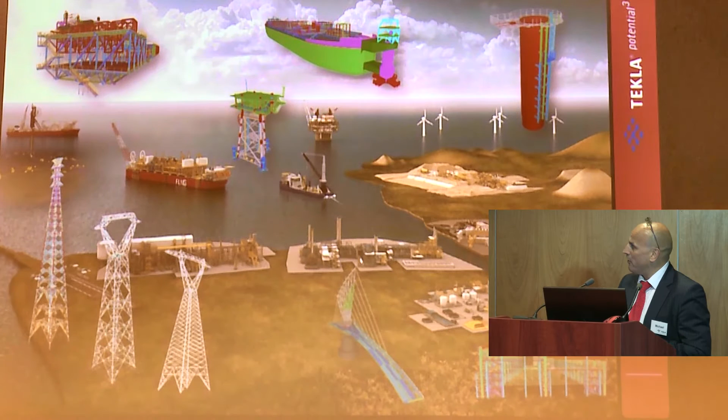In our Tekla world, we get involved with many different types of projects, from general steel structures, offshore platforms, wind turbines, bridge work, transmission towers, every kind of construction project. Tekla Structures is software used for detailing those projects, prototyping them in 3D, and creating all the information needed for manufacture.

Now I'll start with a few glamorous examples. Our main day-to-day work is shopping malls, sports centres, office blocks, that kind of thing. But we get involved in many glamorous projects, such as the Brazil football stadiums. All the stadiums for the World Cup in Brazil were done on Tekla by our Brazilian clients. We also get involved in highway projects and bridge work, sometimes architectural, sometimes regular highway bridges. Looks simple, but it's complicated built-up plate work.

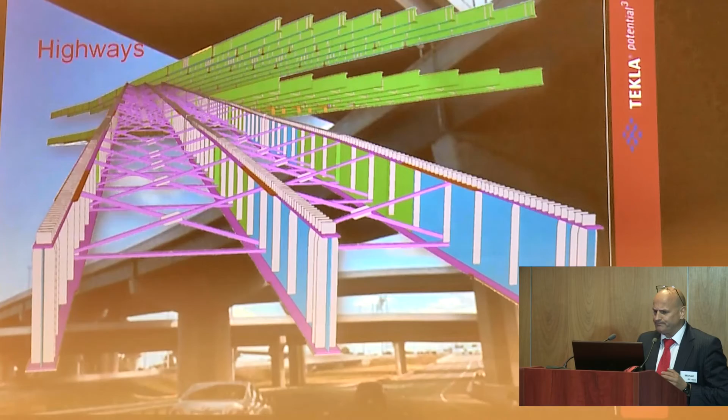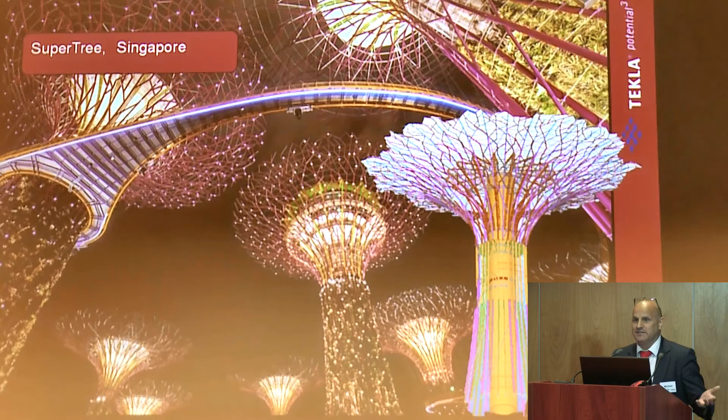We get involved in architectural style projects as well, such as the SuperTree in Singapore, and other architectural projects such as the museum in Singapore. The beauty of three-dimensional software is it allows you to do really complicated 3D geometry without worrying about the mathematics. So as a detailer, all I'm doing is building that project in the computer, letting the system worry about the mathematics, and it creates all the manufacturing data.

And to finish with something more simple, like some transmission towers in Italy. A few other examples here taken through sculptures, offshore platforms, bridges, etc. So that's the kind of work that we at Tekla get involved with our software in the steel segment.

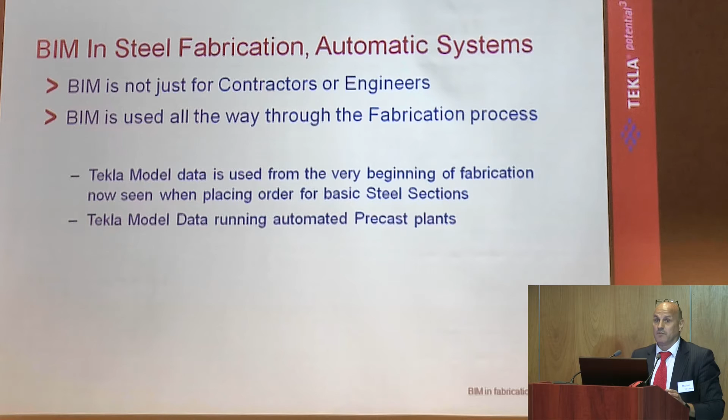As I said before, BIM is not just for contractors and engineers. This BIM also goes all the way down to workshop floor production. So production of pieces in the workshop has data fed back into the Tekla model. The Tekla model goes from the engineer into Tekla, then down to production, and back to the Tekla model. You'll see that in more detail as I go through this.

My example today is going to be not a steel fabricator, but actually a steel stockholder, and it's quite a unique concept. Rather than being a steel fabricator, what they do is actually run a warehouse. Somebody mentioned warehouses earlier, and this is how we can actually link down to the warehouses directly. There's a company in the UK that's recently opened called Parker Steel. It's a long-established company, but they've just opened a brand new facility costing 20 million pounds.

It's the first UK supplier where you can buy the steel online. So when you've done the Tekla model, you can click a button and get the steel delivered to your factory, either by length or pre-processed. It's quite a unique concept, and there are a few of these facilities now happening around the world.

You can see what happens here is it's actually built on the dock side, so the steel can be imported from different countries around the world. It comes from Poland, it comes from Portugal. So the cheapest supplier can supply the steel into their stockyard, and from there it's processed to the UK steelwork market.

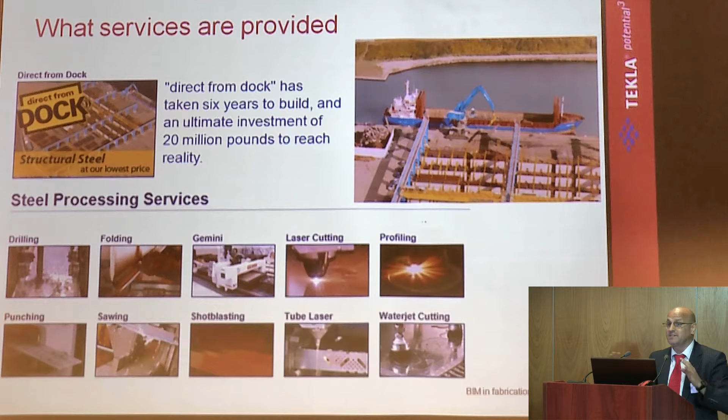They don't just provide structural steelwork, they do all kinds of specialised operations like folding, laser cutting, water jet, tube cutting, shot blasting, all different kinds of general production processes.

That's just a picture of their crane, which is for unloading. You can see that's a stock that's been brought into the yard, ready to be processed.

This stock can come from anywhere around the world, so it's important that the steel is up to a certain specification and grade. The traceability of that steel and where it finally ends up on site is very important in the steelwork market. We have to be able to trace back every piece of steel in a structure to where it was actually brought or bought from. So the traceability and certification of the steel is really important.

Back to the warehouse. You can see the facility within there. As I said, it's fully automated. Here's their plant, here's the guy just working the machine itself, but pretty much just one person running quite a large area of the facility.

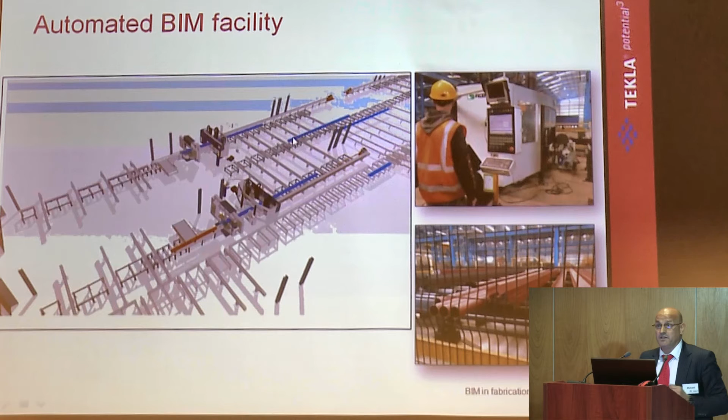From the Tekla model, once it's completed, they can quite simply click on - for us in Tekla it's great, it's one click. We don't have to worry about detailing in a certain way or producing things. We just click a button, and it creates the information to send out for the ordering of this steel.

How that actually looks in real life - here you've got your Tekla model, you've seen a few of these. This is just a small area of a bridge, complete with bolts, cuts, copes, openings. Then all we have to do here is click on the XML and say, okay, export out the whole model.

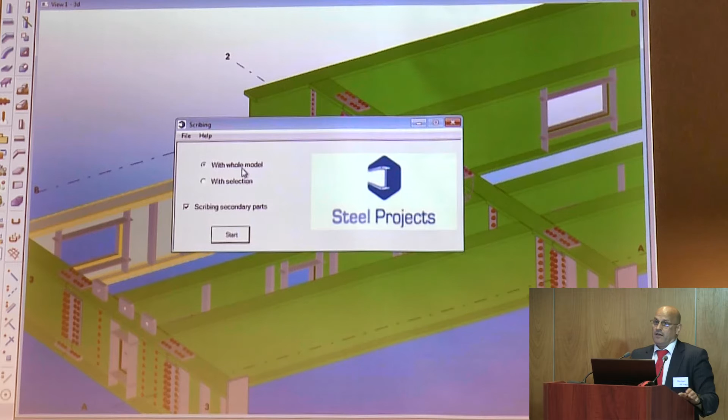That creates one file. Traditionally, when you export to CNC machines, it creates a file for every individual piece of steel, and on some projects that can be hundreds of thousands of files. This creates one file, which you then send to the factory. If there are changes to the project, it sends a new file, compares the two, and tells you which one needs to be replaced or remade. So it's a full revision control system as well, very easy.

For me as a detailer, it's fabulous, because all I do is click a button. We say okay, start that, and it downloads that project then to take to the ordering system.

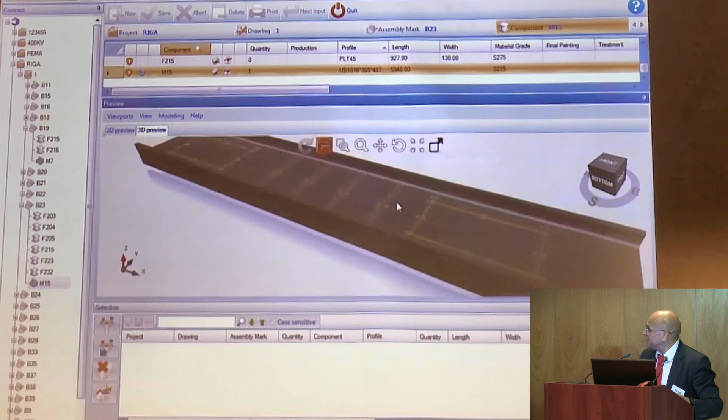What the guys see when they get into the factory itself is they download the steel. They can see these are the elements that come directly from Tekla. This is a project which I named Riga. It's all in phase one, and each one of these is a fabricated assembly, showing all the plates that go together to make that assembly, and the main piece those are fixed to. Uniquely, it also marks the steel to show how the pieces fit together.

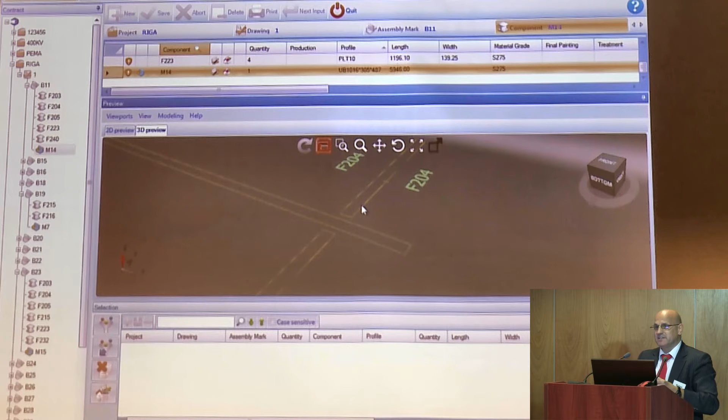This is quite new technology, so a drawing to put this steel together is no longer required. This piece of steel itself becomes the drawing. It's part of the BIM process - not so much paperwork needed, and this is the first step towards that. So now the actual fabricator gets this piece and puts the elements together to make the actual welded assembly.

Let's just go back here. You can see what he does is he exports the data from Tekla, in different formats you can go. We're actually using the IFC format here, which is the new format you've heard about earlier. So it's not just for engineers, it's also for the fabrication facility.

Then what you get down to the production site is the individual pieces ready for production. These pieces are already laid out, as explained earlier, to show how they fit together and what piece it fits to. So this piece fits on the end of this beam here and gets welded together - a nice fit.

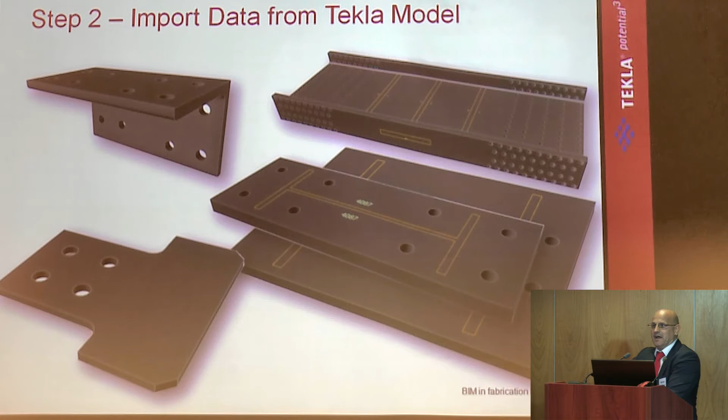Kind of almost like an IKEA wardrobe when you buy it and you have to put it together yourself. It's that kind of thing.

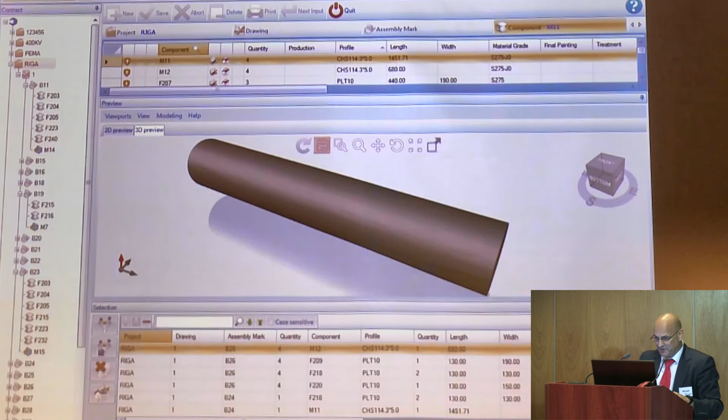Once it's there, you can then say okay, calculate how it's nested into the bars - how much steel do I actually need to buy to cut these pieces. If we go back to the actual software, we can pick up that project and say okay, let's process that, run that project. Then it shows you how that should actually go through the factory. So for example, you've got a piece here, which is a tube.

You can see what happens with this: first it goes to the saw and drill line for sawing and cutting, and it's going to take 6 seconds to actually cut that piece of steel to length. Then from that, it goes to shot blasting, assembly, welding, and painting. So every piece, you can see how that goes through the factory.

So this plate here, you can see it goes down to the Gemini plate cutting, and it's going to take 18 seconds to process that. They can actually tell you, by downloading the model, exactly how long it's going to take them to make those pieces of steel. So it's an estimation of how long it's going to take to produce the actual steel building.

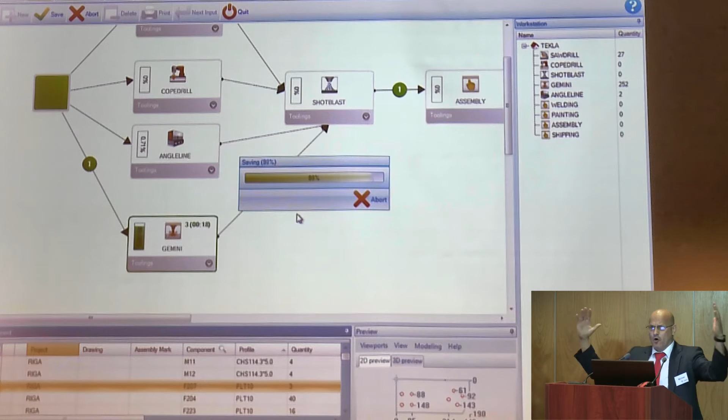Once that's there, we can then say take it to section nesting. This is for ordering of steel, so placing those now into one bar for cutting. It'll become more obvious when I've done it, so we'll just say automatically nest that. So my warehouse now will have certain lengths of steel. This finds the most optimized size and length to nest into, and then will give me the purchasing orders.

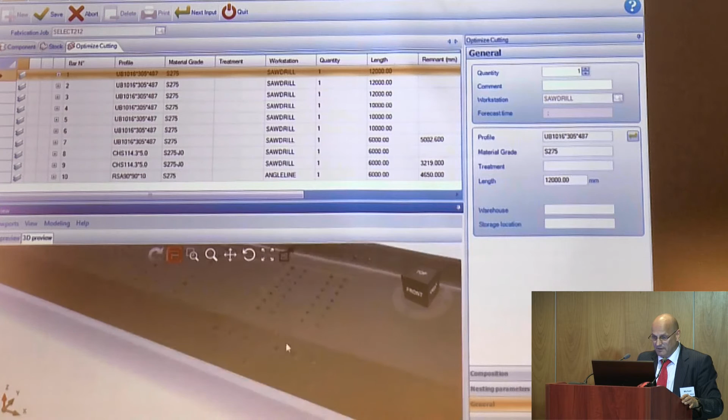This is linked to the warehouse, so it's a direct link to the warehouse. You can see that's the scrap at the end, and that's the actual saw blade cut. That then is one length at 12 meters, cuts all these pieces, like so. You can see it cuts that piece, it cuts that piece, and it cuts that piece there. So that's the full automation of what you need to buy.

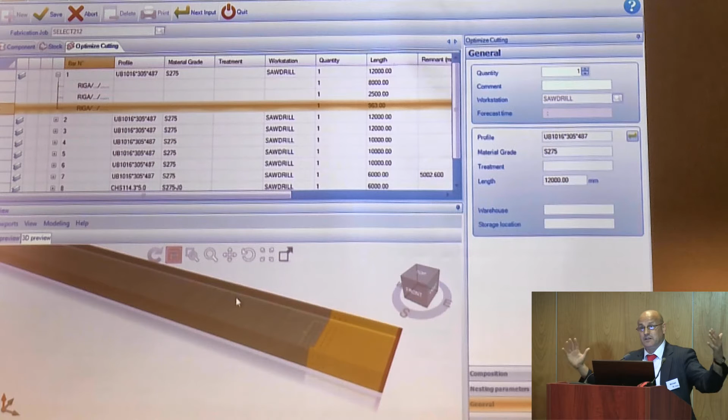So one click from Tekla allows you then to drop it down to the actual production machines, tells you how it goes through the factory, and then tells you what length of steel you need to buy. Simplifies great, one click, it's good stuff.

Okay, then of course what's left over then are the plates. The plates need to be put onto plate nesting software. You tell it what size plate you've got, then it will work out the most optimum way to fit those plates onto the sheet with minimum wastage.

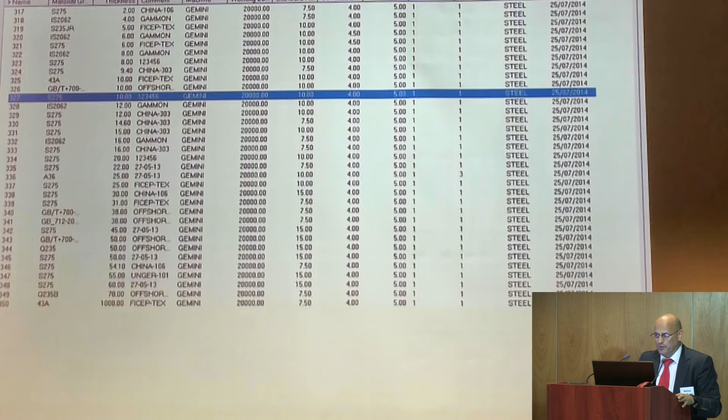Again, let me show you this live. Just put a few of these down, so just exit that and that. So this is a plate nesting software. Now there are many different plate nesting softwares on the market, you can choose what you want, and we can link down to these softwares. If I just quickly run this through, it's easier to show than to explain actually.

So this particular size and grade, what I've got then is a steel sheet, it's loaded up. This is a steel sheet I've got in my workshop, which is here, and these are all the plate parts from Tekla. That's the size, I can tell it it's 6 meters by 4 meters.

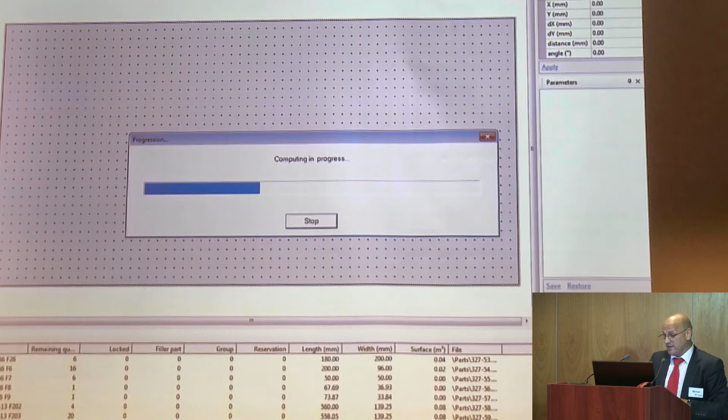Then what we do is we say, okay, work out the most cost-effective, optimum way to nest that. And it looks at those pieces of steel and places them on the actual piece to be cut. Again, it takes a few seconds just to compute this through, because it's quite heavy mathematics. So we'll just let that run through, it will get there eventually. There we go, and you can see that it's nested those pieces on there.

And those are complete with the holes, the marking of the pieces, everything as well. So that now can go down to the machine in the workshop.

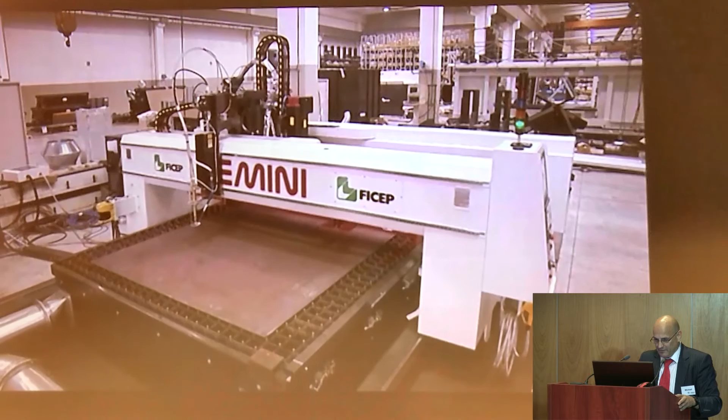The machine in the workshop, if I just take a look here, sorry for jumping around, then looks like this. I'm not going to have this on too loud. So you can see that this machine has got all the operations, so all that automatic data, there's no manual program in here. The actual data directly from Tekla drives that machine and tells you exactly how to operate. I'll just skip it a little bit further on. There's many operations like screw threads, plasma cutting, that kind of thing.

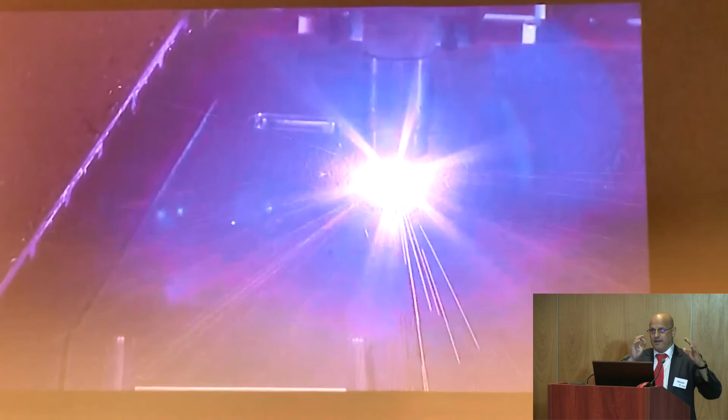So you can see then it goes down for plasma cutting to the table. Okay, so again, that one click into the software drives the whole production facility.

Okay, let me just close a few of these down. So that's the plate cutting. Of course, there are also specialized items like tube connections as well.

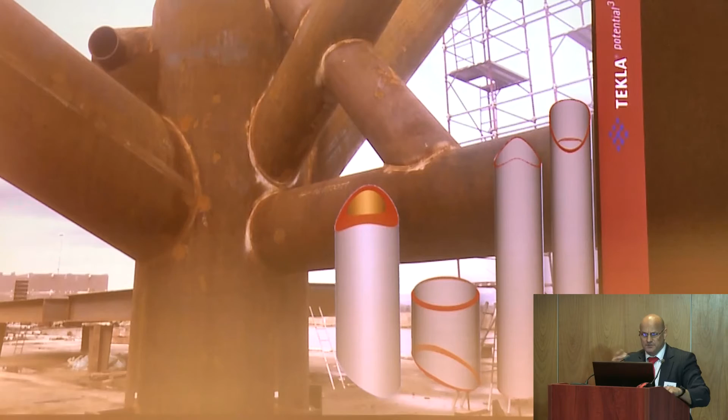We also have within Tekla a library of tube-to-tube connections. With the new range of machines, traditionally you have to draw these old wraparound templates, the unfolding of the pipe. What we do here is place the connections within Tekla, and it downloads directly to the machines. This allows you to drive the machine with its weld preparation directly from the Tekla model. So all these machines are driven directly. Let me just quickly show you that.

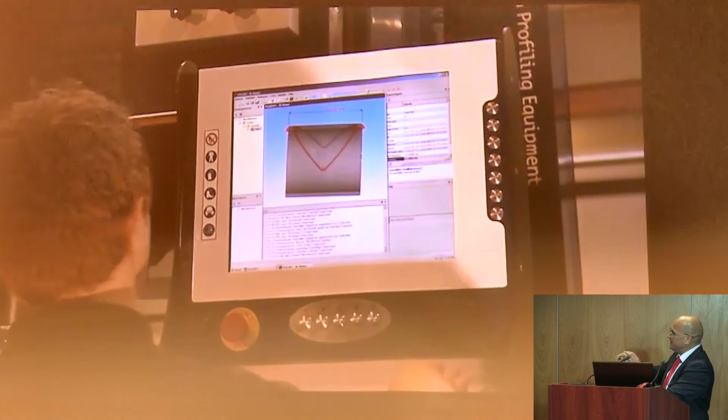You want to close that down. Here we go, so let's go to the HGG ones. Let me show you this one. The machine itself looks like this, a specialized pipe cutting machine. Again, the data to drive this machine comes from Tekla. From this, it drives the machine directly as well, all the operations for the three-dimensional cutting, loading, everything straight from there.

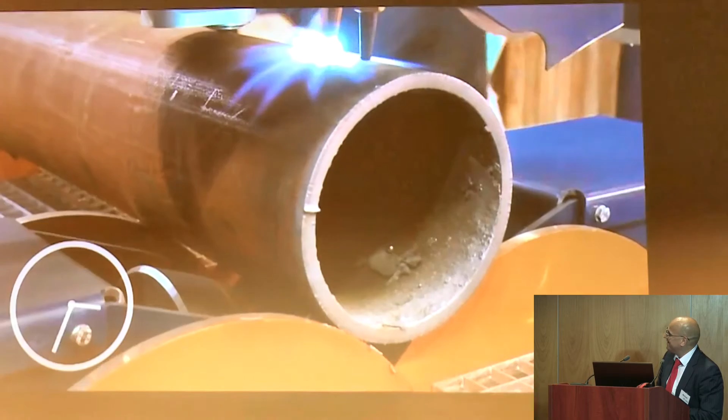So any kind of specialized profile we can cater for in our software. You can see that's a speeded up cut version there. But notice the three-dimensional cut of the head, it's doing the weld preparation at the same time. So one cut does every operation.

Marvelous technology, actually. And you'll see when that fits together, how clean it is. There's no fixing needed. That's ready to go straight into production.

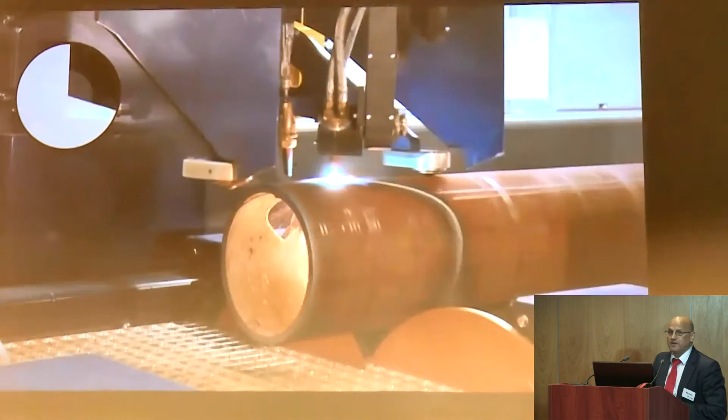All of these links I'm showing you here are part of standard Tekla. So if you have any of these softwares, you can download directly to them. You don't need anything special, you don't need to buy anything other than the Tekla links themselves - the Tekla links come with it.

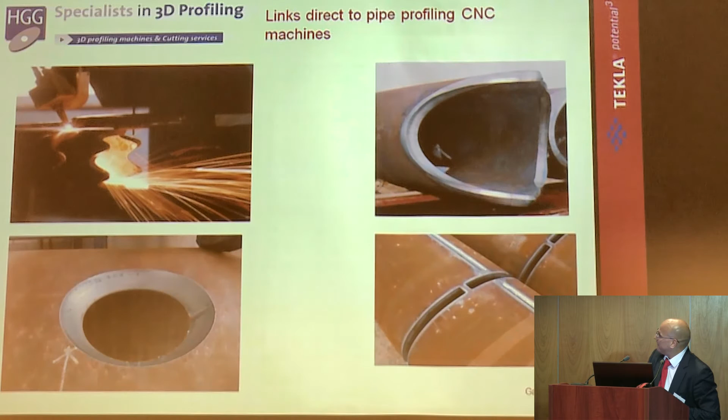Okay, so you've got the pipe connections. You can see that's what it achieves, all different types and styles of pipe-to-pipe connections. And that's the final process.

Okay, so once it's into the factory, they can then run it through. As I said, they will give time calculations for every piece and tell you how long it's going to take to put that project or several projects through the actual factory.

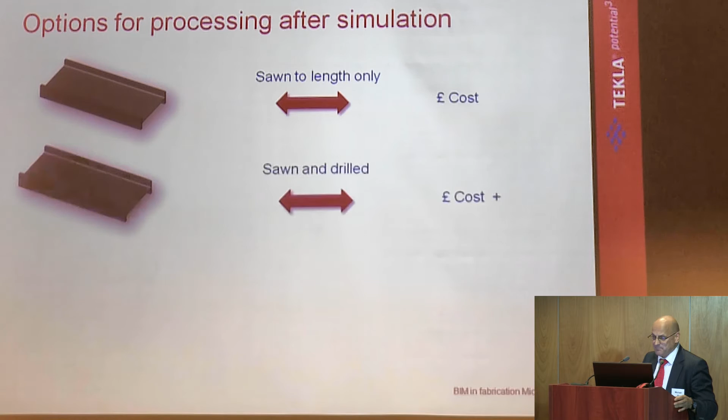Then once it's done, they can say: if you want to buy just a raw piece of steel, it's going to cost you so much. If you'd like it supplied drilled, it's going to cost so much. If you'd like it sawed, drilled and marked out, there's other cost implications. If you'd like it fully processed, with all the copes, marking, drilling, everything, then it's going to cost a premium. So you can choose how you want to buy that steel - buy it raw and process it yourself, or if you're over capacity, this factory can actually make it for you and provide it already pre-made.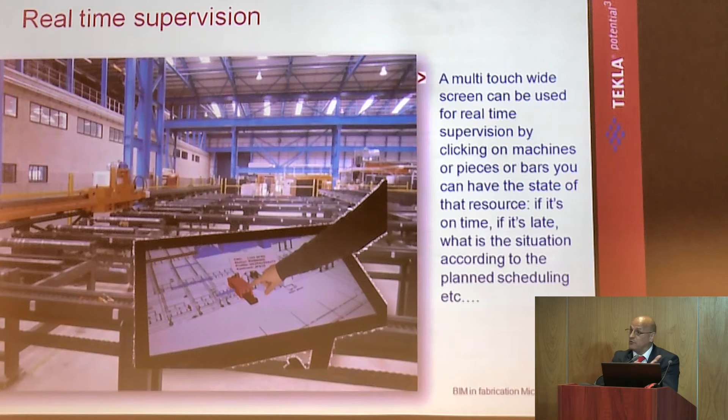Okay, then what it does is go from the stock into production. As it's going through the production facility, it's tracked by iPad, like you saw earlier, but with specialized software for warehouse tracking. And then it goes through the factory itself, flowing through.

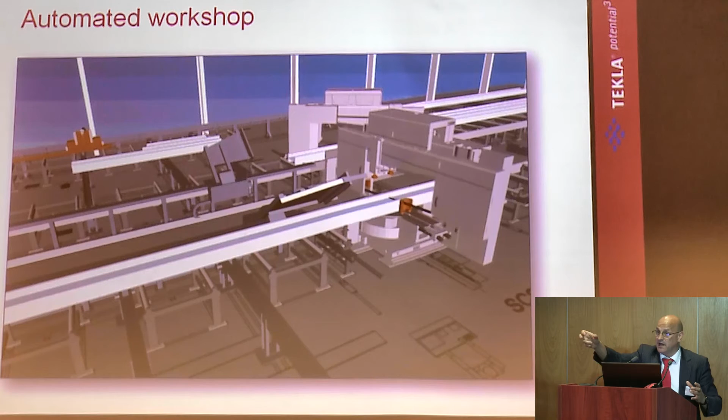As it goes through every machine, the machine tells Tekla where it is in the workshop. So as it goes through a machine, it tells Tekla: I've gone through this machine, now I've gone to this machine, now I've gone to painting, now I've been delivered to site. So all this flow through the factory is fed back to my Tekla model.

And what we see in the Tekla model then, as you saw from Sampo's example, as it's actually feeding through there, I'm going to show you that live anyway. So as it feeds through, the actual building will colour code itself. That was supposed to be an animation, but it decided it's not going to work.

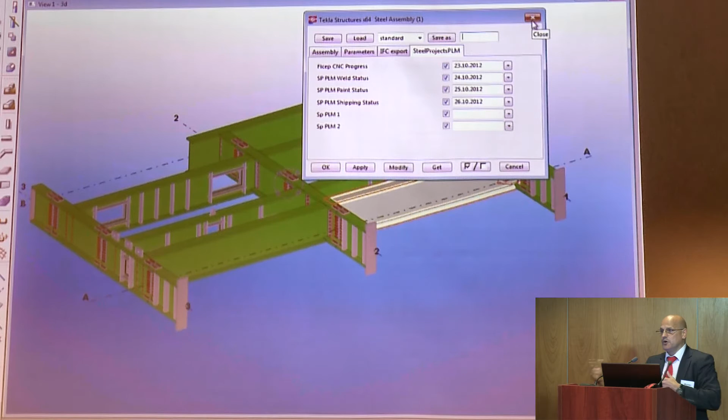Okay, so in the Tekla model you have the same kind of thing. If I click here, just like Sampo showed me, what we've got is different attributes - what's the CNC progress, where it is in welding, where it is in painting, where it is in shipping. You can see the different dates, and those dates are automatically applied. So no Excel spreadsheets, no manual filling in - this is all when the piece goes through the machine, it tells the actual Tekla model where it is.

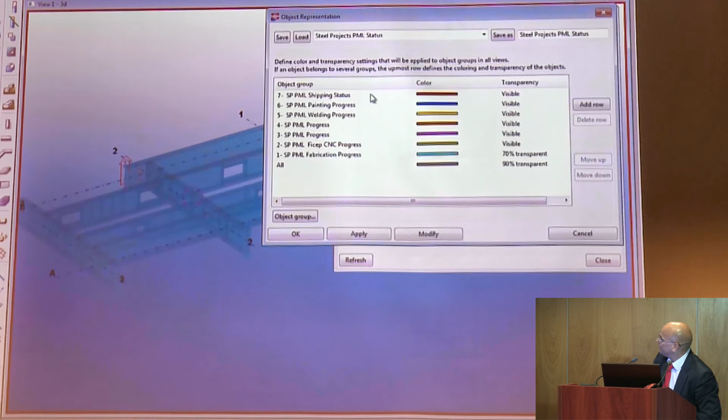Then what we can do is colour code it, so we can say: what's the steel project's status in the workshop? What we have is a ghost of that project - nothing's gone to production at the moment. It's colour coded: shipping is red, painting is blue, welding is yellow. So we can step forward a day at a time - you can see these pieces here, I've gone to the CNC machine, and as you step forward you can see how that is progressing through the workshop. Red means it's been fully shipped to site, like so.

So that's how we can tell the progress of that. And that's actually automatically fed back to the model, so that progress is already there.

Okay with me so far? Yeah? Thank you.

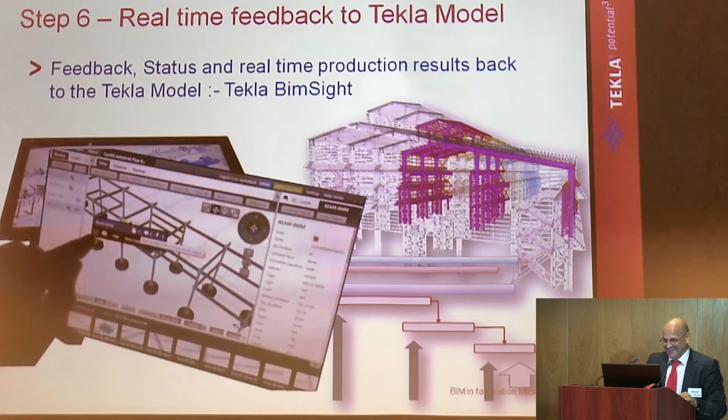And again, we've got touch screen, it all feeds back as well on the iPad version. You can have color coding on the model too, so you get the Field 3D color coding as well.

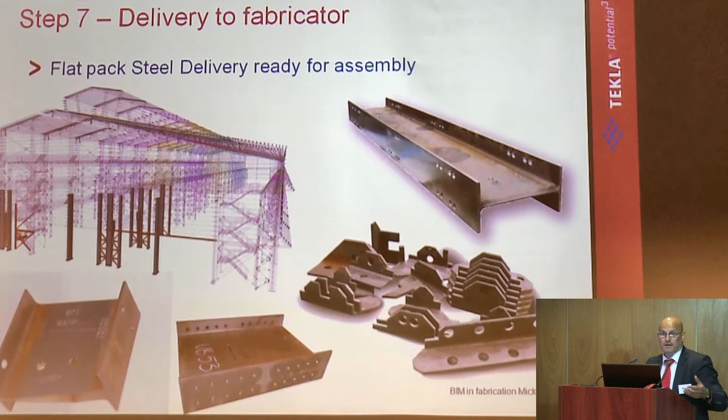And again, when it's done, it's ready to be delivered to the client. So that's the steel done, coped, cut, painted even if he wants it painting. Then what the fabricator gets is like a flat pack delivery of all the pieces ready to assemble together. That's the last status, where the actual fabricator puts them together to make the final fabricated pieces.

Now, there's some new technologies which have really just come to the forefront in the last few years. One of them is robotic welding.

Typically, most factories still weld each piece manually, so they're all welded together. But there are new automatic robotic welding machines which can read the Tekla model and then actually take it down to the robots, and the robots will weld it as per the data in the Tekla model.

So in Tekla we've got a new range of welding functionality that came out in version 19 and version 20, which allows us to put really any type of weld you want within the model. This process reads those welds and then links down to the welding robotic machine.

Okay, let me take a quick look. Let's just open up another model and go into the welding. Notice it's all named Riga. If you take it in here, you'll see we've got an assembly that's welded together. This is the example in the video.

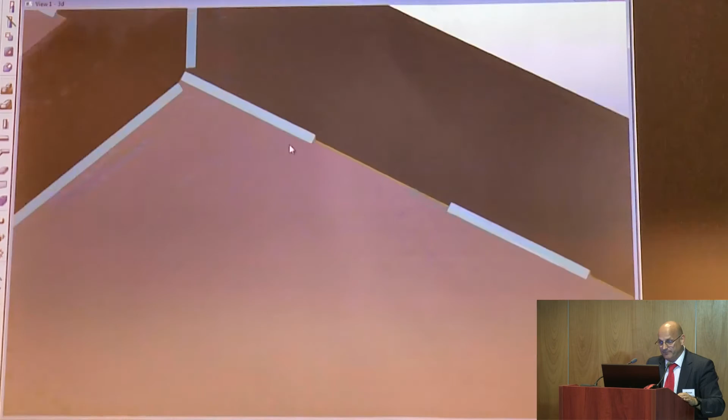So you can see if I double click on these, the welds are a certain size, 6 millimeters, with a spacing of 200 millimeters. Let's make that 12, a little bit bigger, so you can see the actual change on screen. So now these welds are real objects, and it's those objects that the welding robots can read to actually do the welding on site.

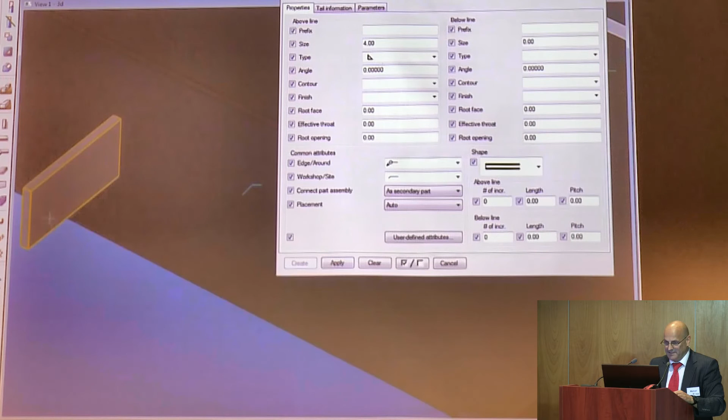If I want to add something new, for example, I've got a plate here that's not welded, I can say okay, let's weld. It then asks what size weld do you want - let's have a 4mm weld. If we say apply and create that, then that piece is welded to that piece, and it welds around it with a 4mm weld. It's that data that the welding robot will read.

To download that, it's the same kind of thing, one-click production. For me, as a detailer, it's fantastic. So we'll go to the components.

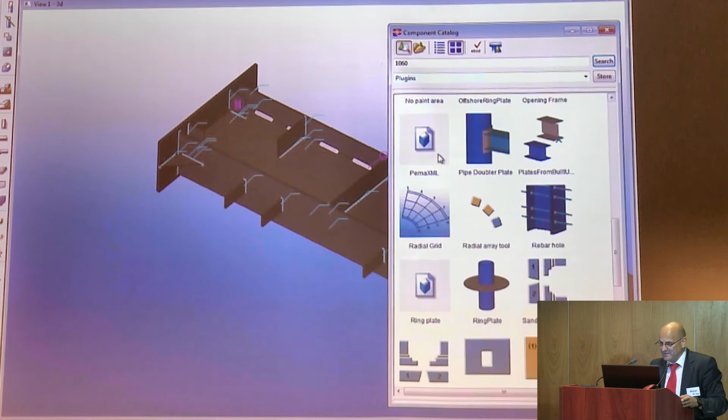It's a plugin. If I come down here, you see we've got a direct link - there it is, the PemaXML. You run that, and it actually creates a link to the welding robot. Simple as that, one-click production, click on create, that's it. I don't have to worry about anything else.

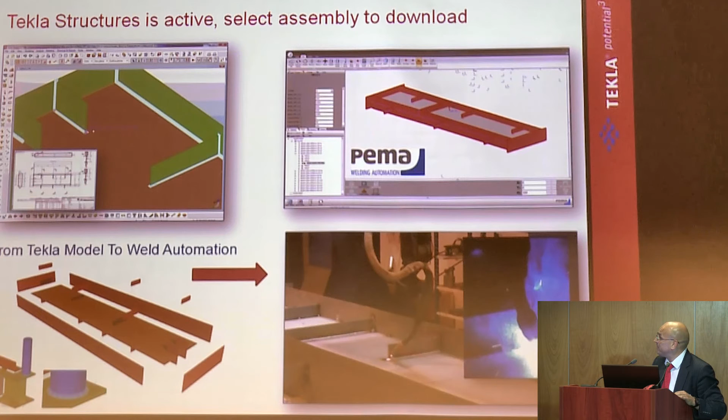Let me just pull that back up. So again, once we've done that, if we export the data, it loads into the Pema software - which I don't have, so I can't show you it live - but it loads into the Pema software and then directly down to the welding robotics themselves, which look like this.

How that actually looks in real life, let's just go back here. Here we are, let me just turn on the welding robots. This is what the actual process looks like in real life.

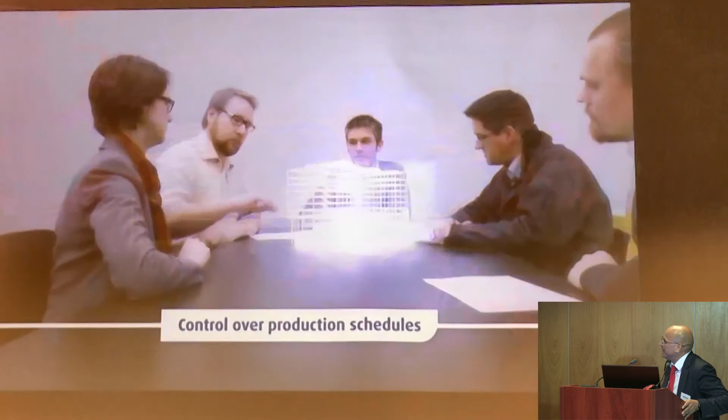Okay, this is part of our Tekla video, which shows people working on the same project at the same time. Of course, this is more about engineering and that kind of thing, but what we're going to do then is pass that down to production.

So taking those pieces, this is a simulation of what would happen, taking that down to production.

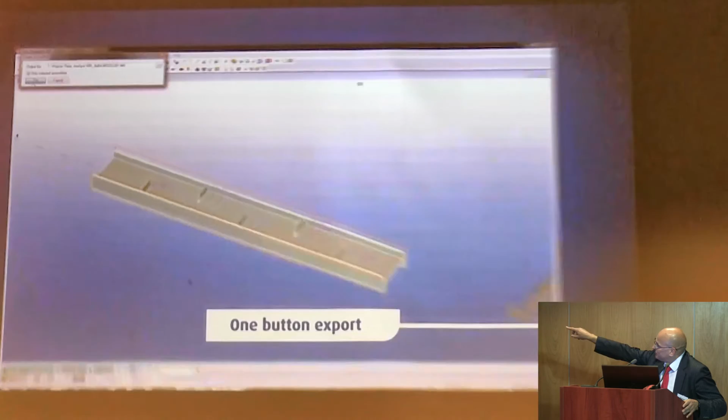Okay, so that's the piece, similar to what I just did. You export it out just exactly as I showed you. Then from that, it loads into the software that drives the welding robots. You can see the welds come through, and you can alter those in the software if you wish.

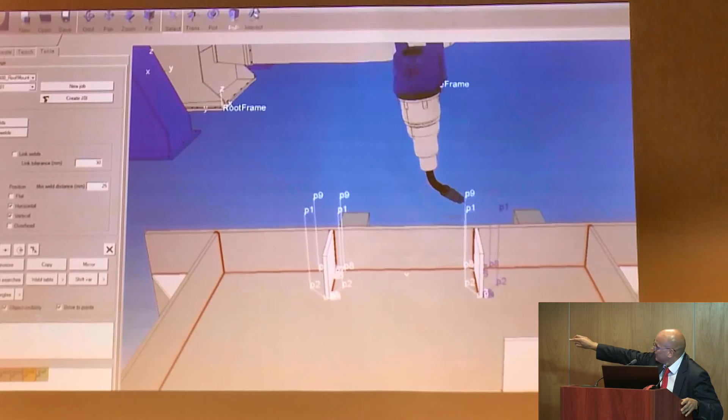So if you want to make them bigger, smaller, take some out, or make everything 6mm, it's completely up to you. You get a small simulation of what the actual welding robot will do. You can check it's good, then you can say, okay, let's do that for real.

It downloads to the welding robot, and this is, again, one guy driving the whole thing. So you can see that's the same piece I've just downloaded, and a nice welding robot which goes to it.

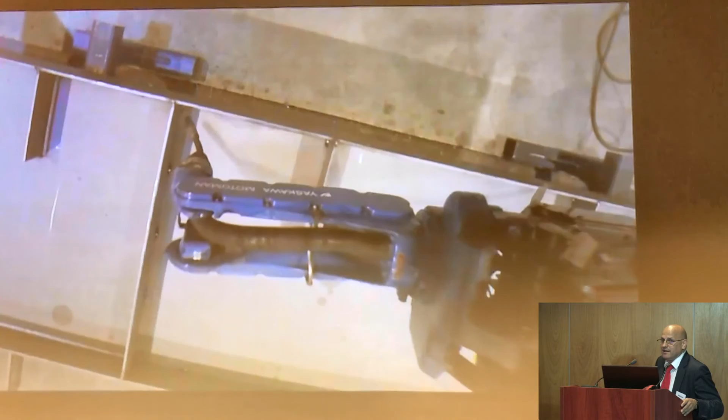My brother's a welder. I showed him this video. He was not impressed.

So yeah, all the welds there go straight down. We don't see too much of this in steel fabrication at the moment. It's mainly in shipbuilding, but it's coming more and more now into the steel fabrication business. So we are seeing a lot more interest in welding robotic integration.

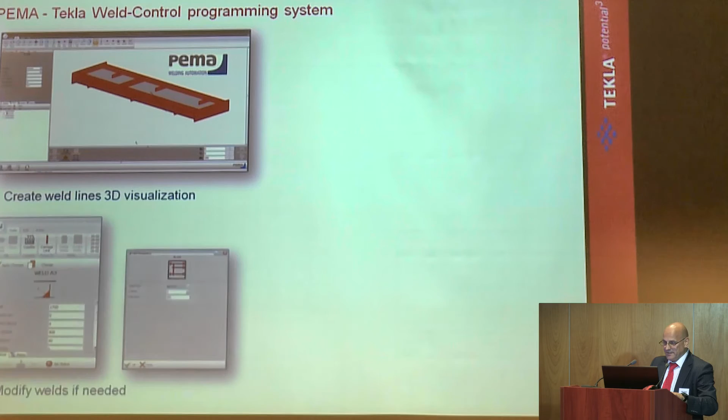Okay, so again, take that down. You can alter the welds if you wish in the PEMA software. This is the software that drives the machine, and of course then it starts the actual robotics. The machine itself with automatic turns - there are all different types of machines available, like so.

Okay, so, just bear with me, let me just go back up here. For some reason I've got a few problems with the computer.

The next thing I want to take a look at is some other new technology. Well, actually it's not so new - this has been out quite a while now - laser scanning, and how we can take those laser scan models into the sort of Tekla build and use them to work around.

Does anyone use laser scanning options at the moment? Yeah. What it is, a laser scanner looks like this. It's a device - if you want to know how much they cost, they're about 40,000 euros. We don't sell them, by the way, that's just the cost.

So it's a station here. Pretty much what you do is I could put it in this room, put it down, and then it would scan the room with all you guys in it, and what you get is a model which you can then utilize - it's like a one-to-one scale model. It takes about 10 minutes to scan this room. If you want to be really accurate, you can let it run for an hour.

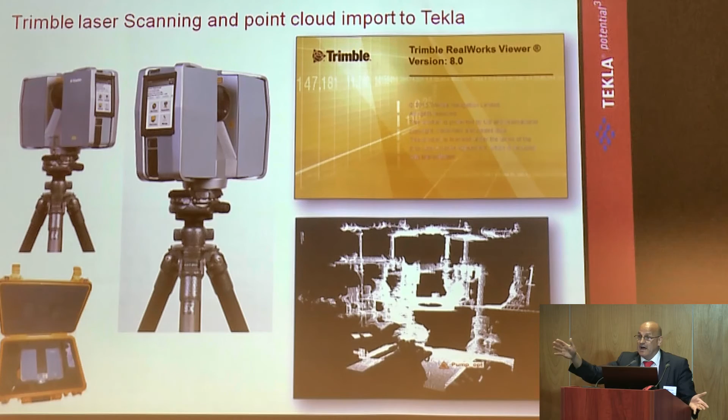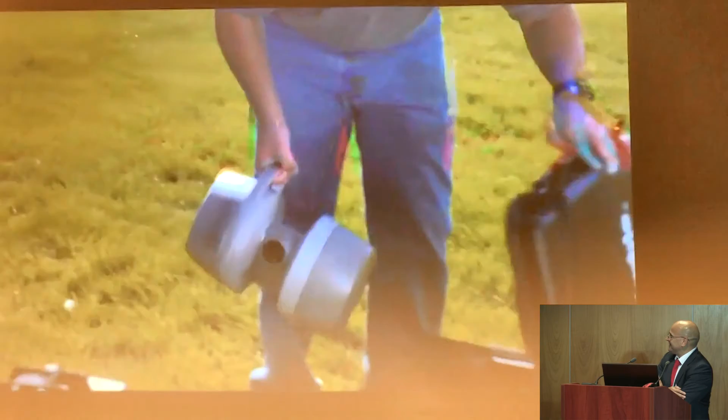Let me just show you what these look like. Okay, so the laser scanner itself looks like this. Let's say we want to work on this existing building. No coincidence that we are owned by Trimble, by the way. So this is the device. Quite simply, drop it into position.

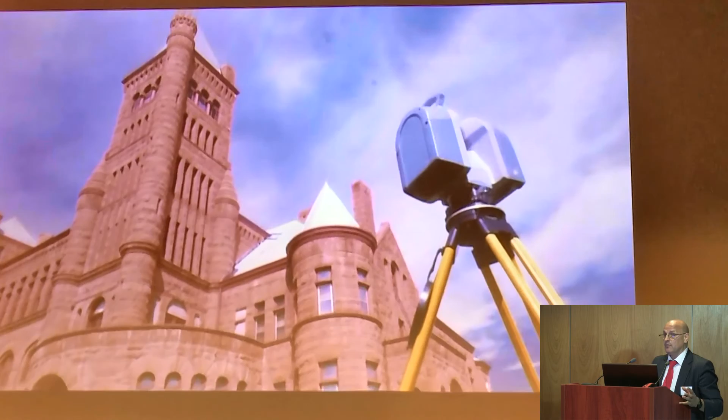Don't know what that is. And then what it can do is it can scan that - it sits there and scans the whole building. It's really interesting technology, actually. And for the steel business, we think it's an excellent fit for the steel, where we're doing retrofits and offshore platforms, that kind of thing.

Okay, and once that's done, it creates a model like this. I'm just going to pause that there. It creates a model called a point cloud model. It's built up from a million little dots. So actually, it's not a real solid object, so it's very difficult for software like Tekla to utilize that. So then what we have to do is process that to build a DXF model from it, or DWG model for it.

So you run it through a processing software, which then gives you a DXF we can use within Tekla. So although it looks solid, it's not - it's like a ghost.

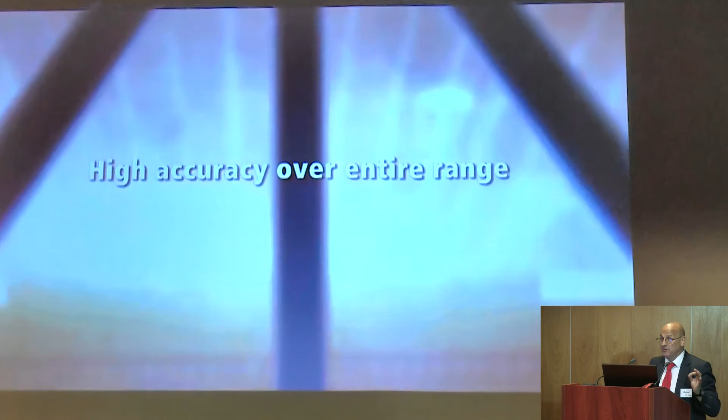Again, a similar sort of auditorium to what we sat in here, actually. So the guy sets this up, and then again just scans the auditorium. These devices really are coming on strong, especially in retrofit, existing buildings, site surveys, where pretty much one guy can do the whole layout without measuring anything. It's completely accurate as well.

So again, you see this example here, and then what you've got is the point cloud model afterwards, like so, and that's what you see on screen.

Used existing buildings, offshore platforms, where you want to rework them, anything that you wanted to rework, you need a sort of three-dimensional model of it. Like so.

Okay, just minimize that down a moment. I'll be able to show you this actually. I was actually going to show you the software, but I'm having trouble opening that up. So again, you run it through, you laser scan it through.

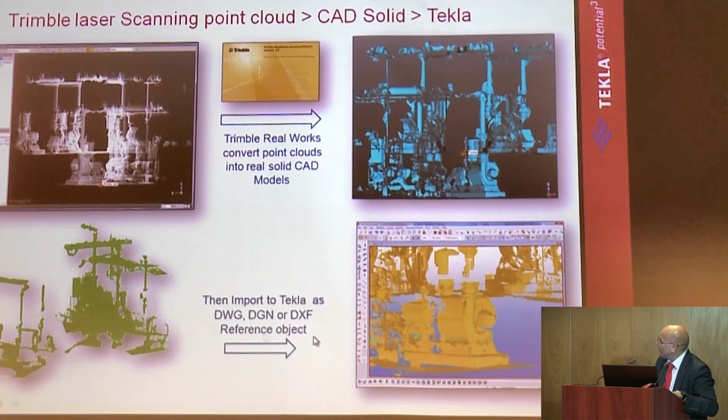Then what we can do is process this. So you can then process it and it creates from that point cloud model, it creates actually a DXF, which then you can bring in as a real solid object into Tekla. A few kind of examples of that.

Works quite nice actually, especially if you want to retrofit something. Again, there's an example of a church there that was done with point cloud, that then is scanned and brought into Tekla, which then we can measure and work against.

An example of where this was used - I've used this model now for the last two years, but we recently got involved in a sculpture that was done in the Netherlands. It was a piece of artwork. The starting point of this was the actual artist himself.

What he did, he went and crouched down and he was laser scanned. Then the laser scan model was taken into Tekla for work as well, and that was the final Tekla model that was done at the end. Again, just a small video of that.

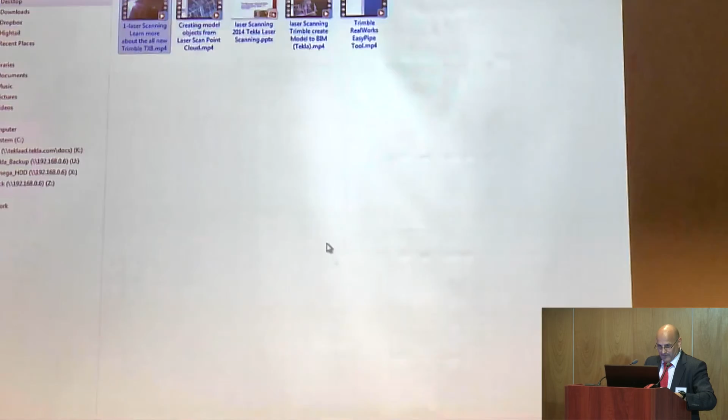Okay, now hopefully if I just need to close down some of these PowerPoints actually.

Yeah? Maybe you can, let's say, come back to sending information from Tekla to the different kind of machines. Could you just explain what type of machines maybe you can have, or is it only those software you showed, or are there also other possibilities?

Pretty much, there are a range of softwares that do production management. There's the one I showed here with Steel Projects, but there's one called FabTrol. There's Strumis. There's lots of different softwares around the world that you can buy, all with the same similar functionality, where we can take the Tekla model, pass them through that, and then create the same kind of data.

Same as plate nesting softwares and bar nesting softwares - all these different softwares we can link down forwards to. Then if we come to CNC machines, all the major CNC machines, we have got direct links to them. We produce data and it goes straight down to the machines itself.

A few of the advanced ones, we can then bring the data back. In that case, we're talking mainly Ficep and Peddinghaus. That's what gives the full BIM flow of bringing the information back into the Tekla model.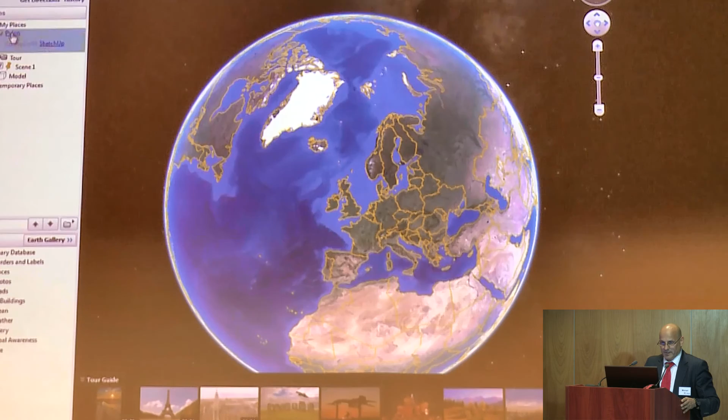And then from that, through SketchUp, we can place it in its real Google Earth location. So then from this, we can say, okay, we have Pylon, double click on that. Then it says this one's in Arizona. So then we had the laser scan of the terrain, and that's the transmission tower in its real location.

I'm really lousy at navigating this, by the way. So you can see then that's the transmission tower in its real location. Let me just zoom in - I told you I was bad at this. So there's the transmission tower in its real Earth location, looking like so.

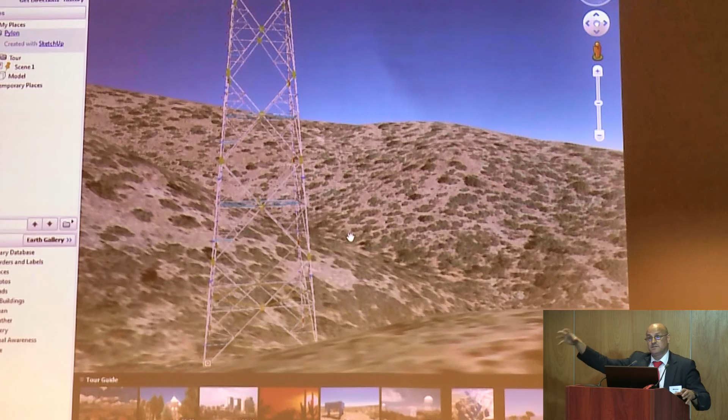So a lot of the Earth is mapped in 3D. So when the Tekla model's completed, you can actually take that model and drop it into its real Earth location as well. I just really wanted to finish on that last part, showing you how you can not just take a model down to the workshop, but bring the data back and actually put it in its real Earth location as well. So there we are.

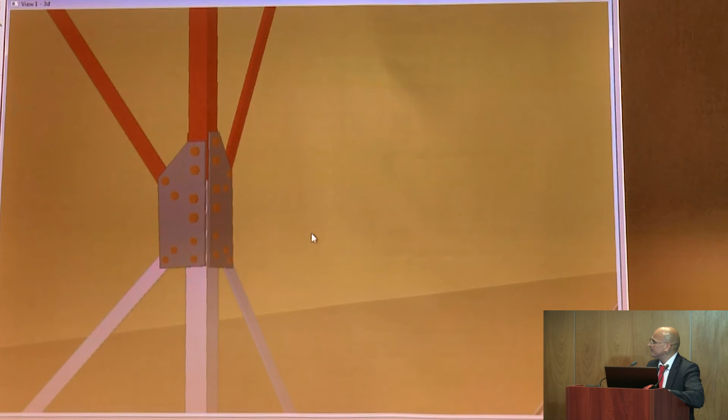As I mentioned, maybe we can touch on a possibility to work not only with heavy steel, but also with facades. Oh, facades, yeah, actually.

Wasn't expecting this. Good job I'm prepared, isn't it? Okay, just bear with me. So we're talking about facades, such as curtain walling, that kind of thing, so just bear with me. Talk among yourselves while I find this. Okay, actually, let's have a look, and let's ask for questions while I find the model, please.

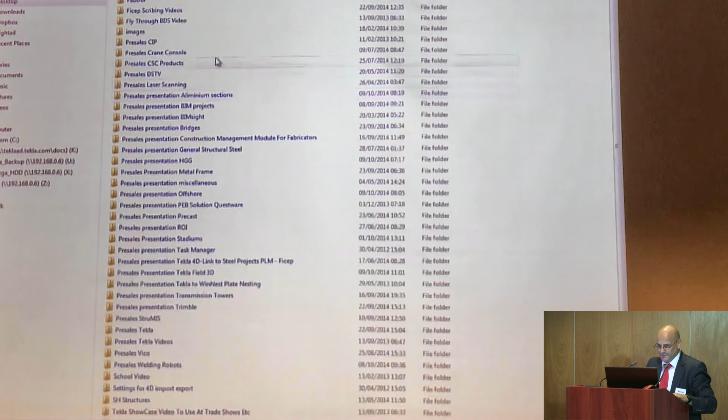In fact, I've got it here. There are questions. I know that in Latvia there are some fabricators using that way - one is Elma Metal, a cut center in Riga, they belong to Elma group, they're working like that. And I know there are some which partly work this way. We also have in Lithuania a few companies which also partly use this technology, just using Tekla models for sending the information directly to machines without any parts drawings. And of course they like it.

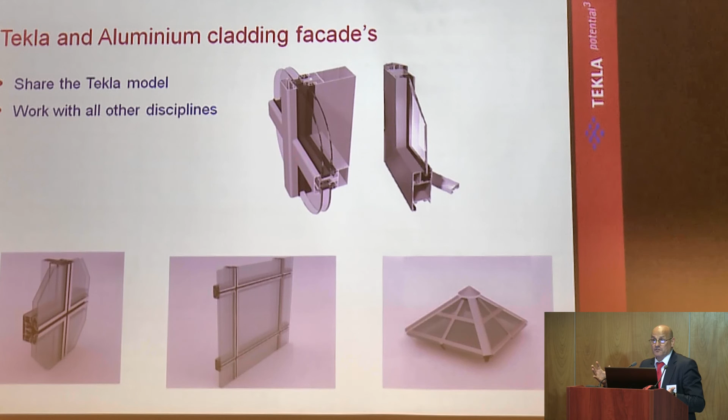Sorry, I didn't have this one set up, so that's why I had a little delay there. We've done a lot of work recently on facades and curtain walling within Tekla as well. So although it's not typically part of our steelwork remit, we've had a lot of client requests saying they want to put curtain walling onto the structures, asking what we can do. So we built a new toolbox with all the standard profiles, Schüco being the main ones - I don't know if anyone's involved in curtain wall, but Schüco are the main ones here.

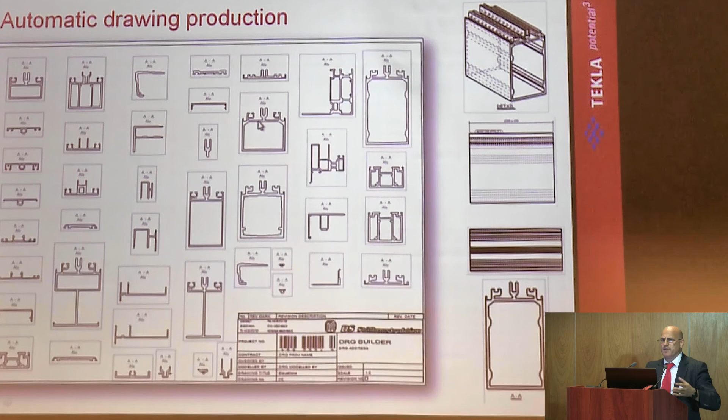Then you get these really complex shapes, complex aluminium shapes that go together to make the glazing or the curtain wall fixings. You can see we'll bring those into Tekla, give an idea of the section through of some of this stuff. It doesn't matter how complex these sections are, we can easily bring them into Tekla and use them. You get the output from that - drawings again showing how these curtain walls are put together, sectional view, and the material list from that as well.

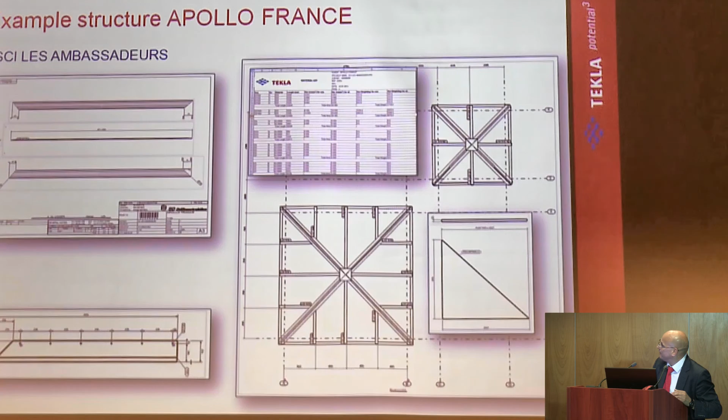A couple of examples, such as a sample glazing top and the drawings for that - I've got a better example I'll move on to in a moment. If I just skip through, take a look at some of the examples here. These are Schüco panels built up from multiple layers of rubber gaskets, aluminium sections and glazing, put together like so to create these panels. That's what the panels drawing will actually create for us from Tekla.

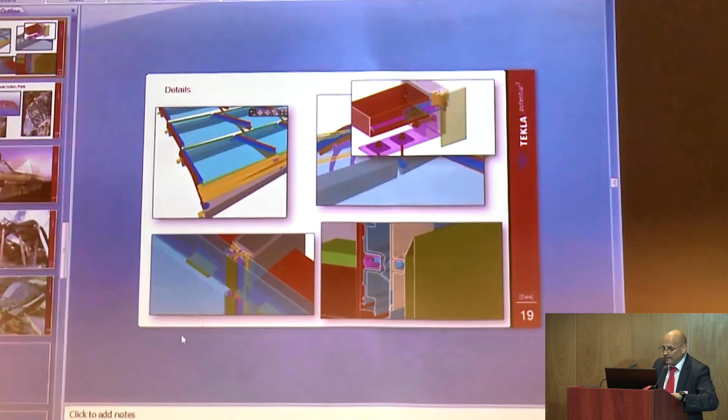Now, I've got a nice example of a real one here, done recently in France - this is the new train station in France. All of this is a Tekla steel structure, but the curtain walling on top has also been done on Tekla, which is quite unique, actually. I'm not going to go through the whole thing, but you can see it's a very complicated three-dimensional structure, all glazing on top of that.

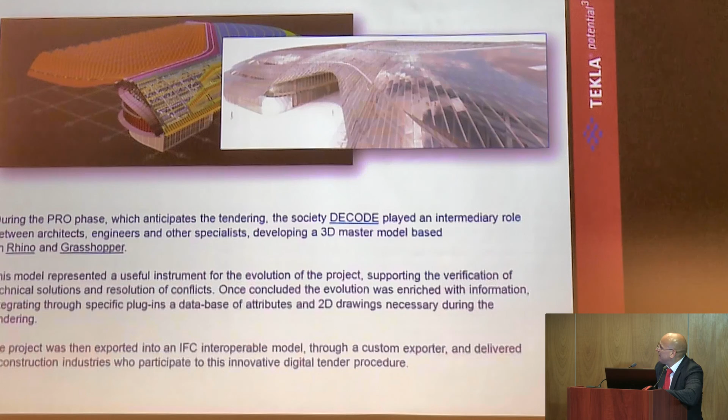You can see that's the actual Tekla model. This is some of the glazing panels and fixings that are there, and the side panels and stuff like that - an example of that. You can see again, these are the glazing panels that we've built up, sections through. Even with these profiles, we link them down to the machines to make the stuff as well.

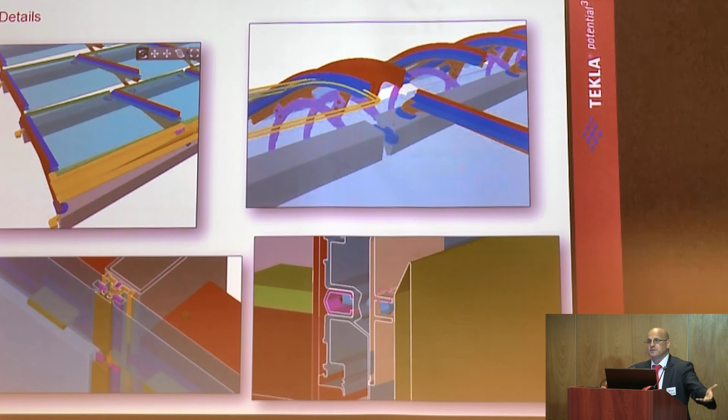So ordering of the aluminium sections, the cutting of the length of the steel, it's all downloaded to the machines as well from our software - again, one-click production. And that's what the panels actually look like on site, just to give you an idea how it looks. Quite nice actually, it's still under completion, so I don't have the full complete model yet. But again, another one that was done in France - seems to be big on the curtain wall stuff.

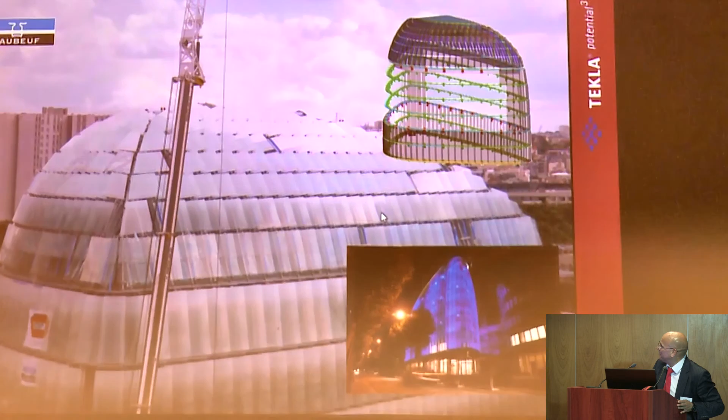I do have the models if anyone wants to take a look in more detail, but I have to dig them out and find where they are. Okay, so that's my presentation finished. Thank you so much. If there's any questions, I'll take any questions, or if you want to speak to me privately, I'm available for the rest of the day. Okay, thank you.